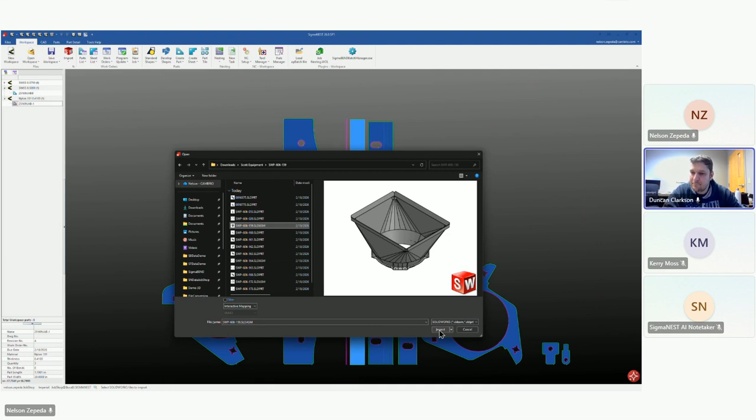Okay, so then that at least that's right. But yeah, so we'll go through it here again.

This time it was already on for the other one, but in this case it's actually going to be used. I have my auto detect bend lines set, so it'll see where the bend line is, set it as a marking line, and I have it set to modify the bend line. So rather than getting something that goes completely across the part, it'll just add in 1 inch tick marks on the ends. It's up to you whether you use the modifier or not, and I do like that a lot.

Can you offset from the edge a little bit? Can you say don't mark all the way to the edge, but go an inch in from the edge, then etch a 3 inch mark? I don't think we have a way to offset from the edge, but you can set what your length is. In this case it's just going to add 1 inch ticks, but if you wanted 2 inch or 3 inch ticks, you can change that. But there's no offset, unfortunately.

Yeah, we think we can work around that, but that's good to know. We'll also add in the bend direction, so if it's 90 degrees up or 90 degrees down, that kind of stuff will get added there as well. That's the only thing that was different about this one.

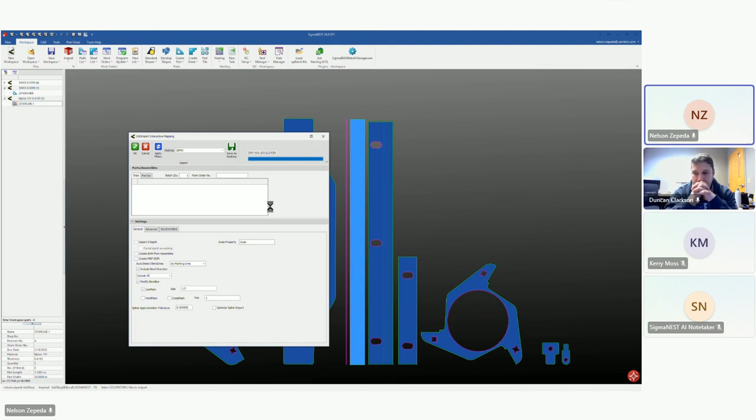Again, same exact setup otherwise. We'll just hit OK on this one, get that brought in, and then it just takes a minute or so to get this processed and converted and brought into Sigma completely.

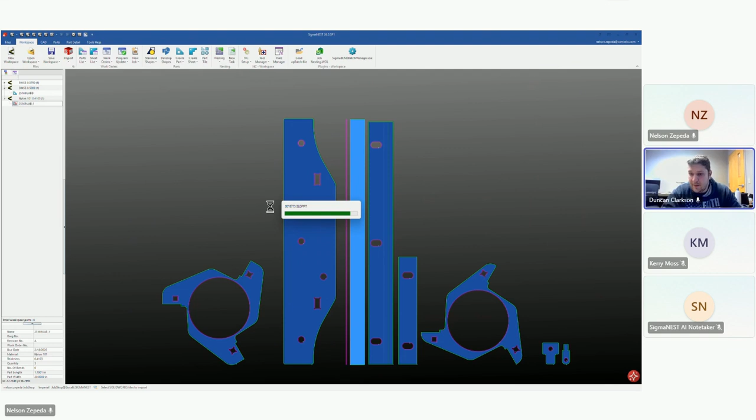For your bend parts, we do recognize if there's a flat pattern in SolidWorks, and we'll grab the flat pattern version of that part if we see it. That's a good question because we do a lot of our design in the sheet metal module within SolidWorks, which usually gives us the opportunity to flatten and get a flat pattern for those parts.

Is it reading the K value from SolidWorks itself, or is it doing its own? No, we're doing our own, but we have material tables in SigmaNest with the K value in those tables that it would be reading from. So you'd want to make sure that they match up and are the same as what SolidWorks is reading. And in the event there's not a flat pattern, then we'll do the unfolding.

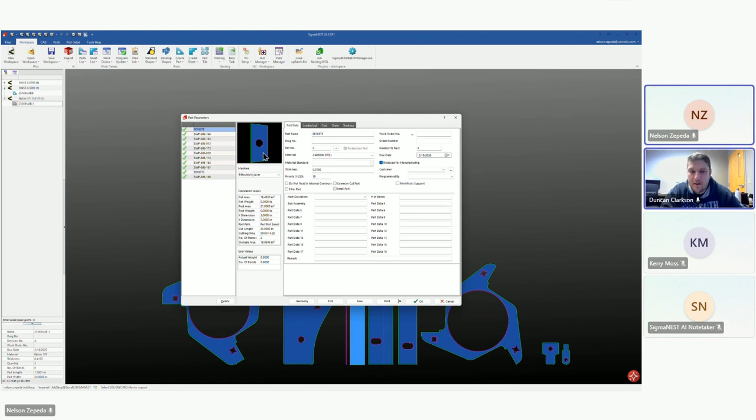Sometimes SolidWorks can be a little bit goofy, I don't know how much you work with it, but it will create a new configuration called the flat, basically. It doesn't do that automatically until you create a 2D drawing and import a flat drawing. It doesn't auto-generate that, at least for us, for some reason. So would that be a problem here?

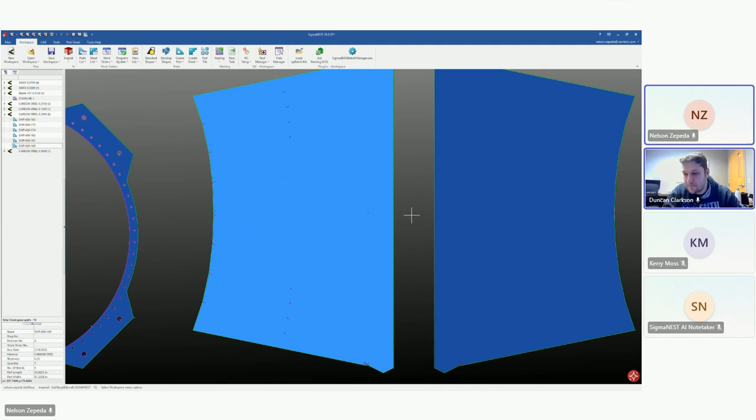It has the flat option in the design tree that you can manually trigger, or you can toggle the flat option within the design ribbon. But does it need that configuration actively in the part file? I'm not as familiar with that off the top of my head, whether we're reading for the flat configuration or just reading for the flat design feature. I can double check on that though and get you an answer.

This is an example of the part here, and I'm fairly certain this is the rolled one, but it adds the little 1 inch tick marks on the end, and if I zoom in here, we have the little tags being added there.

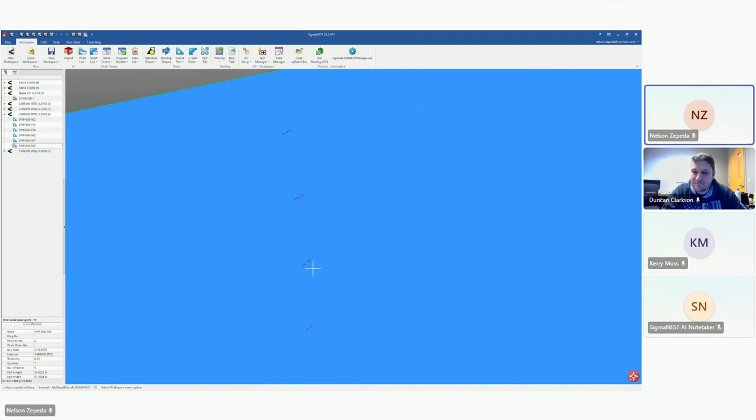There's options whether you want to actually mark these onto the part itself and etch them, or if you just want them to show up in your reports without spending any machining time on those things. We have the ticks available as well for marking or etching, anything like that.

That's great. Yeah, we'd probably go longer than an inch. I didn't realize how large these parts were here, but yeah.